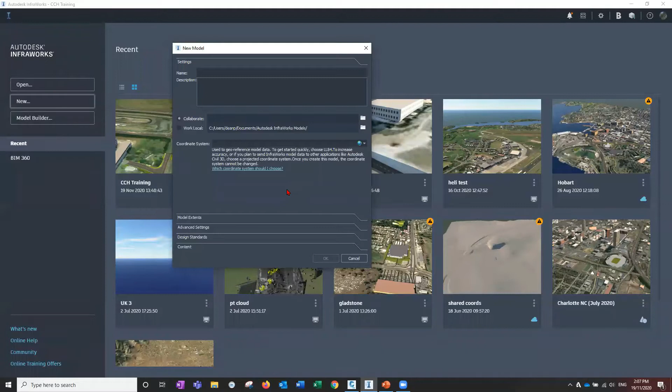And you get the same thing when you go into the model builder. Here you need to select a coordinate system, but it reminds you there, if you're unsure, select lat long 84, but you won't get the same accuracy down to millimeters.

All right, so having discussed those, I think that's all I need to look at. Yes, let's go and have a look at the road marking side of things, which was next on the list. So I'm going to go into here and start my example.

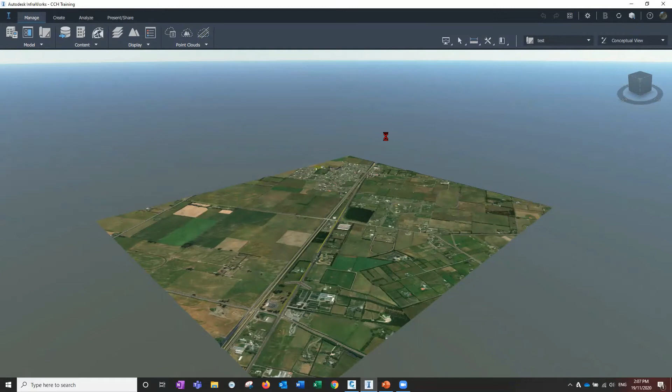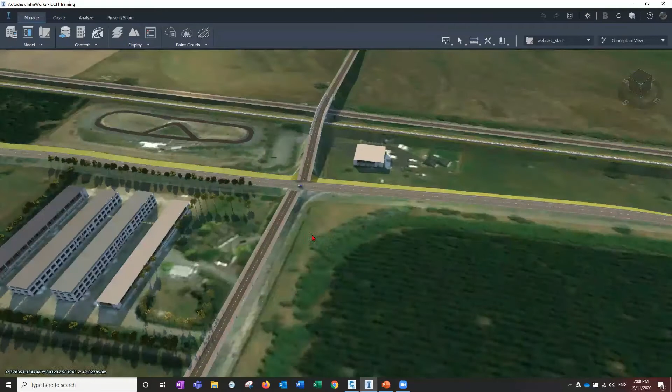All right, so this is just to the south of Christchurch in the South Island. I've just got a little example here, putting some trees and things to make it look pretty, of a little intersection. Before we play with that for my Civil 3D example, let's go and have a look at this road marking stuff.

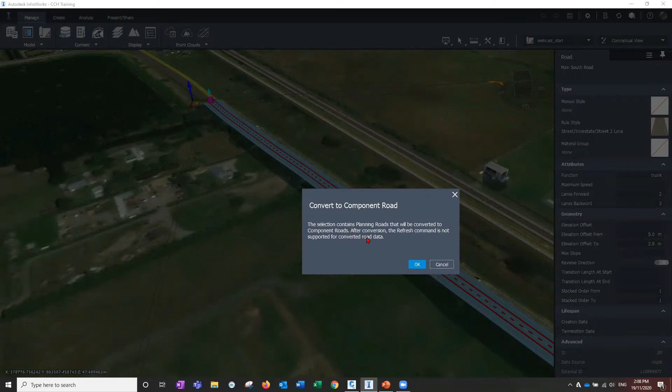So the road marking stuff applies to the component roads. If we look at this one here, that's not a component road yet, so I'm going to convert it. This is new actually - it's telling you that if you convert this to a component road, since it came in from the model builder, it will no longer refresh with the model builder. That's fine, that's what we want.

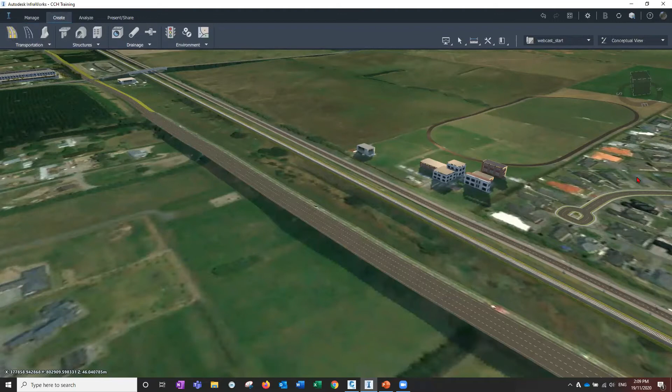Okay, and I will sketch in a little piece of road to go with this. So let's do an intersection, I suppose - an X intersection would be okay. So create a new component road. What type do I want? Let's see from assembly here.

4-lane, no, that's a bridge. 4-lane divided - I suppose that would be all right, let's try that one. I'm going to start over here, crossing across at an angle, down through here. There's my... oops, the curve didn't go in there, but let's just try it anyway. And then draw.

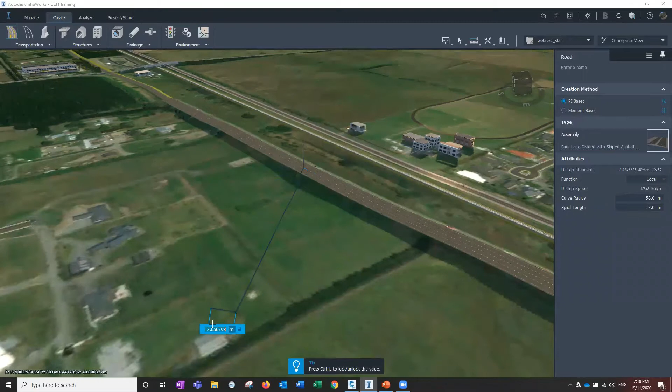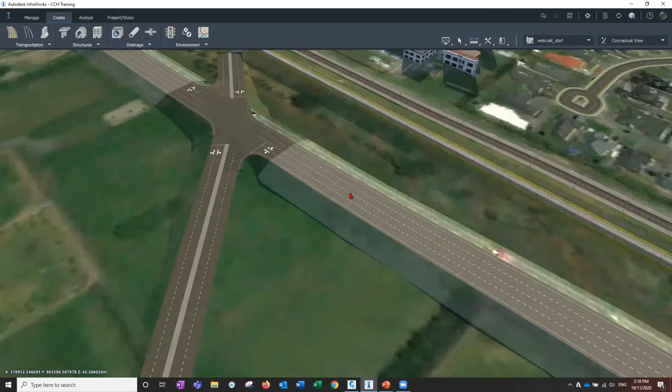Okay, so road marking. Well, if we're going to want to see road marking, we're going to have to probably remove... oh, we'll do it on the other road actually. We'll keep that median in just to be a little bit different. On this other road, we can pick the road itself to get the center line.

And if we right click on there, there is the pavement markings, which is the new one, and go modify lane markings. If we back off there, you can see it's just a dashed line down the middle of the road, which is probably unlikely on a highway like this. Selecting it, right click and go to pavement markings, modify lane markings.

We now get some options here. So we've got the lane marking on one side, the second side, which is those two, and you've got the center one, which is the median. We can change the style here to say a non-dashed, no overtaking line. And we can change the color to be our yellow road stripe.

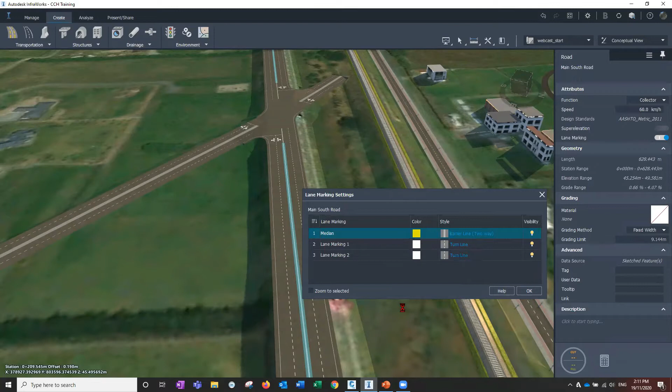And if we wanted to adjust for the heck of it, we could make one of these lanes very narrow and make it a bike lane or something like that. Perhaps if we wanted a green line, we can go more styles and make it - I'm just playing, I don't have an off green, which you might have. So this is going to be a very bright green, but I could make one of course. And there we get the ability to go and change those.

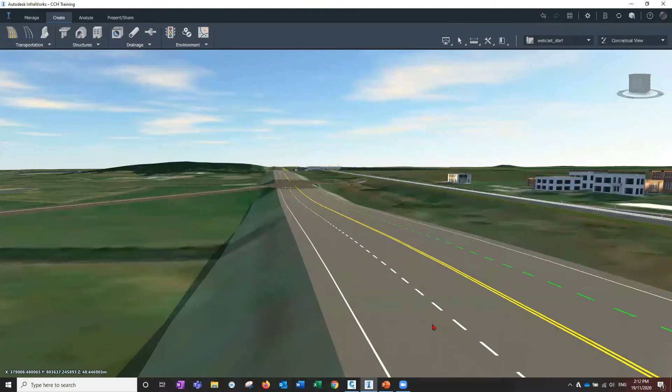The other thing that a lot of people didn't like, myself included, was that all of these lane markings had a shadow underneath them previously. Now they've actually removed the shadow, which was asked for a long time as well. But the lane marking itself still appears to be slightly above the ground surface, which is why we had the shadow underneath previously, but they just turned the shadows off, which makes it look a lot better.

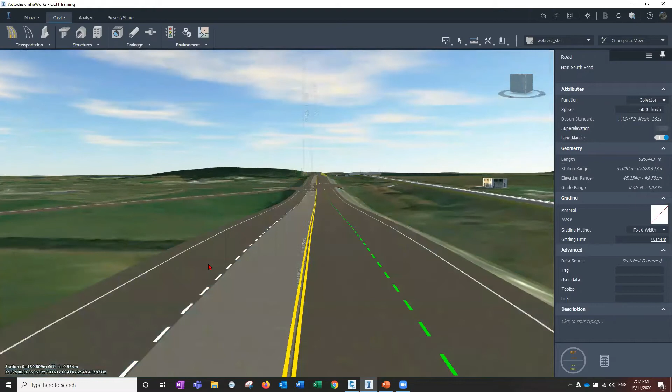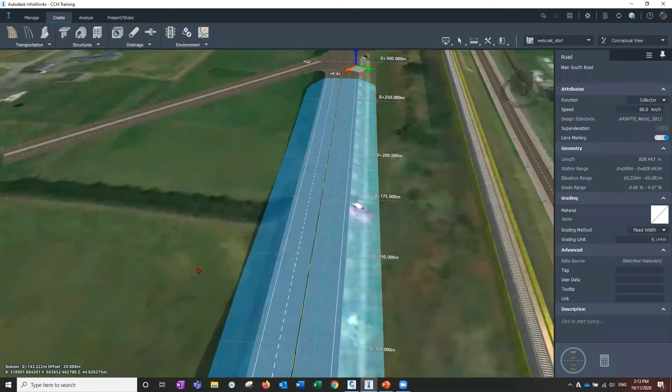Before you ask, I have been trying to find a way to split the center line or lane marking, such that you can have a double yellow line here, dashed on one side, yellow on the other, as was in the options we had for pavement markings. But it looks like it applies to the whole length of the alignment of that road, which is what it's actually running on at the moment. I've tried splitting it to put a new assembly in that area, but while you can change the assembly, the cross-sectional shape of the road, it doesn't let you put in a distinct or separate line in the middle. So I guess that will be coming, but for the moment it does the whole road.

But at least it gives us options we didn't have before. Now looking at the intersections, this is quite interesting - actually one of the things I've been asking for a while. If I put my intersection here and choose those lanes on one of the approach roads, you've got that yield line again that you can change the position of, where the lane actually comes into the intersection.

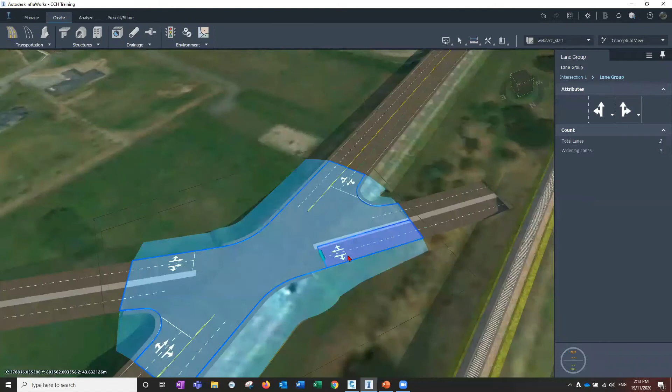We had that before, but here's the new thing. When I select that, up in the stack on the side, here is the ability to change the lane marking, which we had before. So if I make that just a left turn, that should do it. There, it's done it. But the thing I really wanted was these ones.

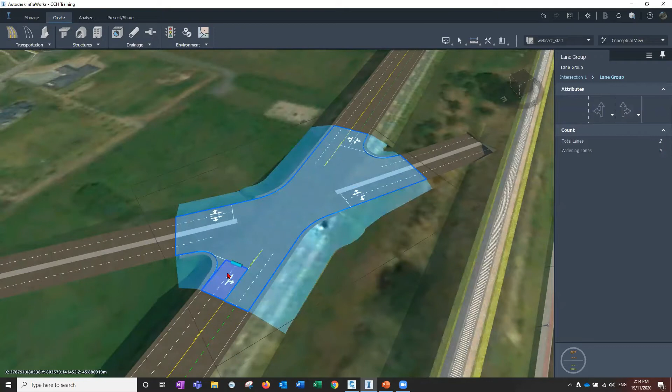On the main road, it's unlikely that you're going to be putting in these markings, so I want to turn those off. Instead of using the drop down, you just click on the arrow, and that will turn those off. You can do the same on the other side. That's something I personally have been asking for several years now, and it's nice to have.

Now, I don't think you can extend these yield lines all the way in, or can you? Yeah, you can, but it doesn't do the other approach. I did see on the web somebody talking about that, saying that it's coming - the ability to run those lines all the way through an intersection is coming. Something that's being worked on.

That will be nice. Now you can turn off that yield line, but let's have a go - it eliminates the other things as well. Yeah, I think it turns off the marking for the intersection itself. The yield line, if you turn those off, I think it removes all of the marking, including the arrows. So still a few things around there, but they're working on it.

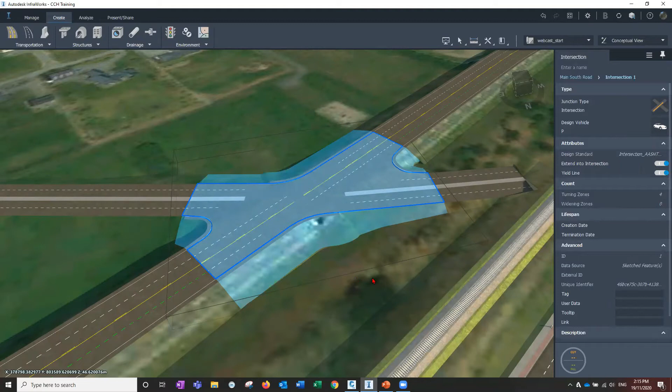There's also one more thing with these. If you do something that doesn't really make any sense - let's try this, whoops, don't turn it off, do it that way - there we go. If you get a conflict, so obviously straight through traffic, you don't want these ones turning into them, it'll highlight in orange and say there's a conflict on this approach. So that's a nice little warning as well, if you haven't seen those.

All right, so that is the lane marking. Anything I need to talk about on that additionally?

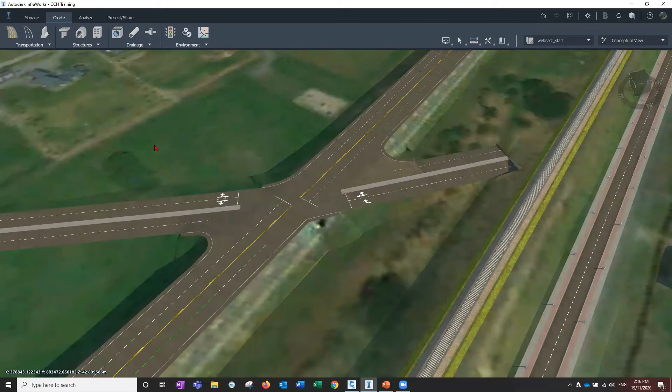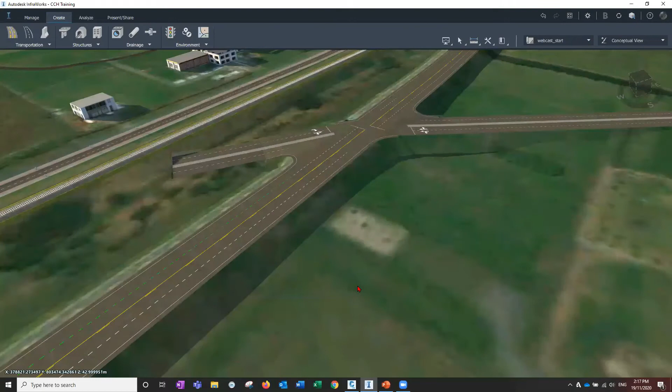So moving on then, we want to look at the import of Civil 3D models into here. Now, if you haven't seen this for a few years, it did change - I think it was the end of 2020, but certainly beginning of 2021 it changed. So if I go back to my Civil 3D here, I have a design I've already been playing around with to modify that intersection down where the factory is.

It's in one of my drawings here, let's go and find it. The Infraworks start, I believe - hope so. Just make sure I'm in the right place. I'll turn on the map data.

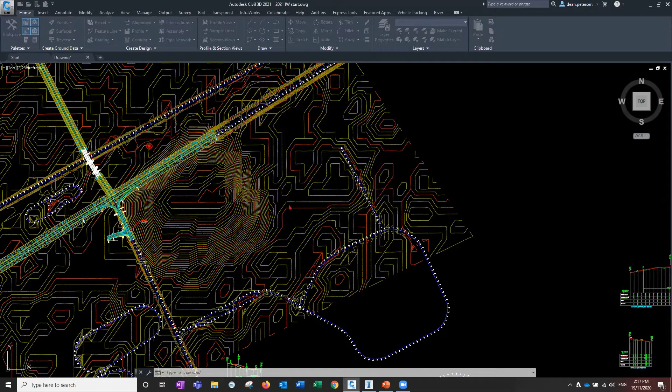Okay, hopefully we should find the same imagery that we saw. Yep, we're still in the right place. So there's that big forest or pine plantation, there's my buildings, and we're on the same intersection.

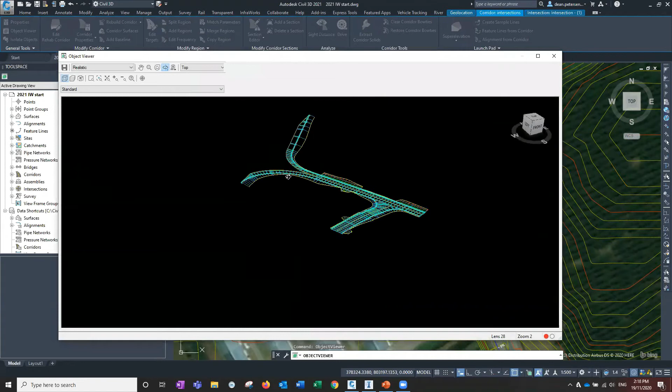So what I've actually done is construct a new Civil 3D corridor to rebuild that intersection and do some interesting things with an on-ramp and an off-ramp. I wanted to test something a little more complicated, in terms of having different regions and things that you want to pull into InfraWorks. That was the idea behind the changes they made to being able to import these things.

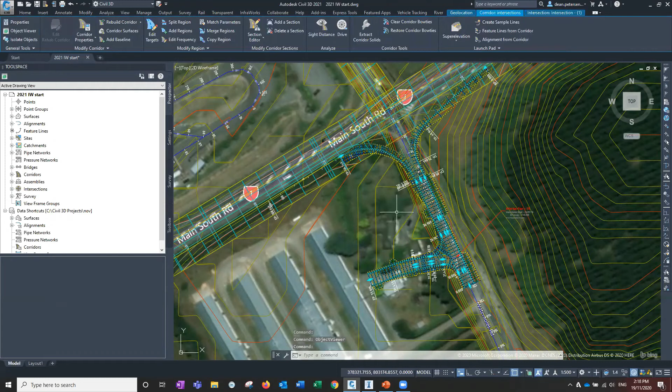So I've got an intersection there, and I've got my own regions for the two turning ramps. It's difficult to make that in InfraWorks itself, but you're much more capable in Civil 3D of making those, and then we want to take them back to InfraWorks to see those.

So I'll just check that everything has been rebuilt. Intersections rebuild - that should be mine, all rebuilt there. I'll do a save.

I think we are able to open this without closing it in Civil 3D, so we'll give it a try. It may complain, but we'll see how we go - be a good test. So back in here, there's my plant, the pine plantation there.

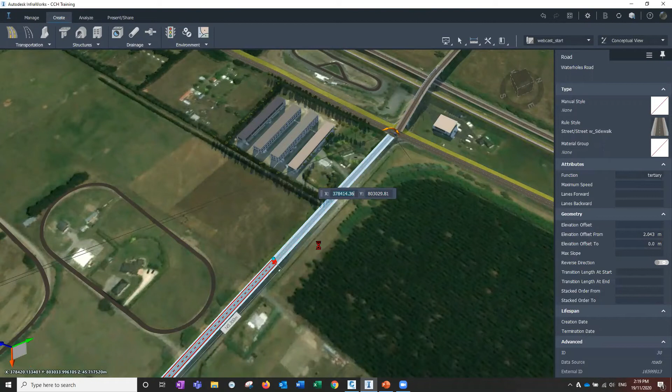I'm going to pick the existing road that came from Model Builder, drag it back to make myself some space. We'll play around with that later on to connect it back up.

So this is the area where my civil model is. Now what we want to do is make a new proposal here. I'll call it demo. Demo, yep, why not? Demo.

And we'll bring in our Civil 3D drawing. Now, to get this to work, the transfer we're about to see, to bring in a better or easier to use Civil 3D model, you do need to be using the same year version of Civil 3D and InfraWorks. So if you're using, as I am here, InfraWorks 2021.1, you do need to be using Civil 3D 2021 as well, because it is a two-way process.

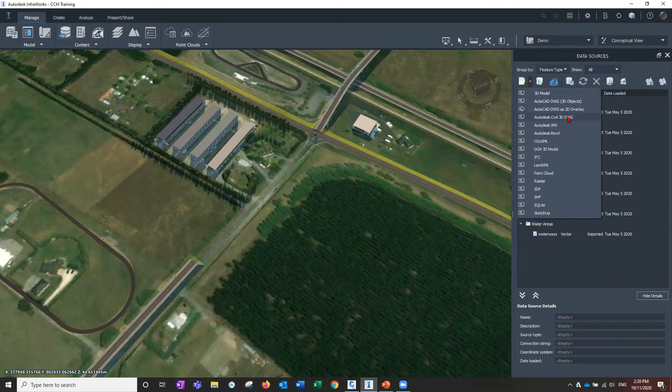So in here, if I go to the data sources, and I'm going to read in my Civil 3D DWG - it was on there, InfraWorks start is the one I just did. And it does the connection. Now it'll scan that whole drawing and find all the things that can be brought in. We only want the corridor.

So that's all I'm going to bring in. We don't need all these ground surfaces and other surfaces - those are top surfaces of the corridor. No, so it's just the one that says roads up the top here. Those are the alignments and corridors. Going to go OK.

Go and configure it, so it appears over here in the data sources. And go to Civil 3D drawing. Now here's all the alignments, everything that was in the drawing. It still has one that thinks it's still out of date there - a little warning that says if you haven't rebuilt the corridor, for some reason that curb alignment on the intersection thinks it's out of date, but the rest looks all right. I think that's probably just a little error, maybe because I've got it open at the same time.

Could be. So I'm going to pick that line, hold down shift, pick the top line, and first of all turn them all off - I don't want them all coming in. I just want my corridor I've designed. So that was, let me see, the driveway.

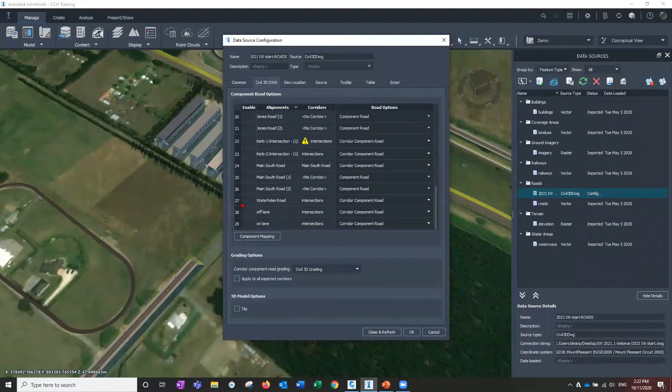Now, each of these is a region of my corridor. So, yes, a region - there will be regions. So the driveway was one piece, the Waterholes Road was the other road. So that's the two branches, the driveway and the Waterholes Road.

Then we've got, I want the alignments of my intersection, those regions coming in. And also my two on-ramp and off-ramps, which were called, where are we? Off-lane and on-lane, there we go. That should be all I need.

Now, I can just go OK, and that's what I'm going to do. Oh sorry, close and refresh, and it will bring it in all with a whole bunch of defaults already preset automatically, which is fine. But if you don't like it, you've got this component mapping here.

Now, this was here before in 2021, but you can change the material that gets applied to all the different components of the corridor that's coming in. So there's your footpaths, curbs, shoulders, etc. Change the materials that are applied to each simply by clicking on there.

Sorry, on the ellipsis button. Oh no, oh that's interesting - that's the priorities of which draws over the top of which. So where are we? Oh, it's double click on it, and it opens that up, and you can apply different material to each component. However, I'm just going to go with the defaults because they're actually pretty good.

So I'm going to cancel out of there. But before you do that, you do get an option here down the bottom to talk about the grading, or decide what you want to do with the grading. Either put no grading on the side of the road, use InfraWorks grading, or we can use the grading that Civil 3D worked out - so the actual batter slopes from Civil 3D. I'm going to use the batter slopes from Civil 3D because they're more complex than the standard slopes on InfraWorks, and we should see that happen when it comes in.

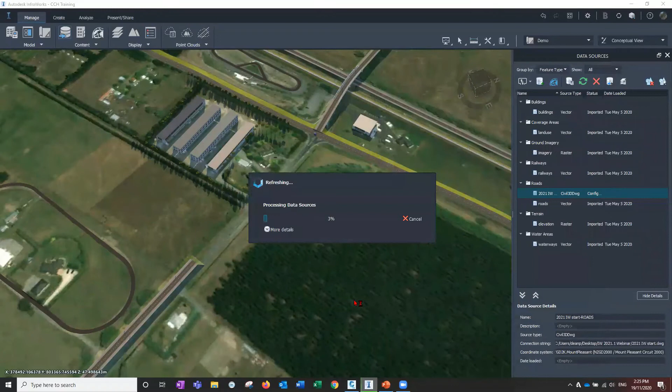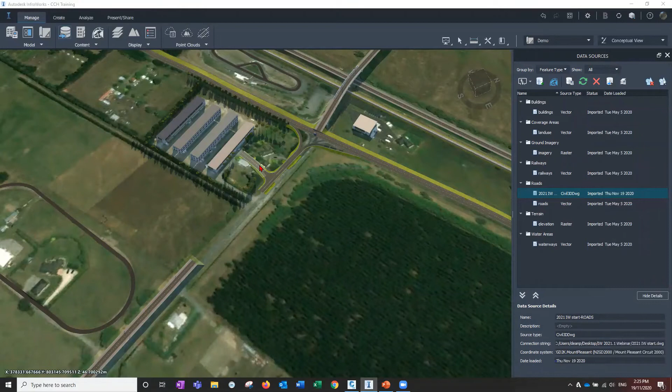I'll just take a moment to read that in as a model. Sorry, I just needed to clear my throat there. All right, so here is the Civil 3D model that it has brought in.

And it's done a fairly good job of that, actually. Or actually, I'd say a pretty good job. When I first did this, I did notice that I had actually made a mistake in Civil 3D. I didn't notice it in Civil 3D until I first brought it in here, so that's why I left it in. My road is changing width, and it's blatantly obvious when you've got a nice pictorial view like this that I've got something wrong. So we can go back and modify that in a minute.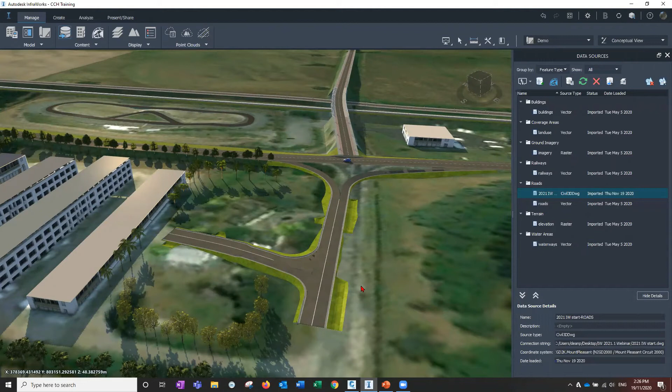Now, as I say, we did have this in 2021.0, though they have made the process a little bit more reliable, and they've got the ability to use the coordinate systems to bring them in.

You can see it's doing a nice match up with the edge of my road with my little turn lanes here that I've sketched in very quickly. I haven't spent much time on this, so it's a bit rough, but you should see what's going on. And as you can see, we've got the batter slopes from Civil 3D, so when it's changing from cut into fill, it's putting in those table drains as the Civil 3D defaults.

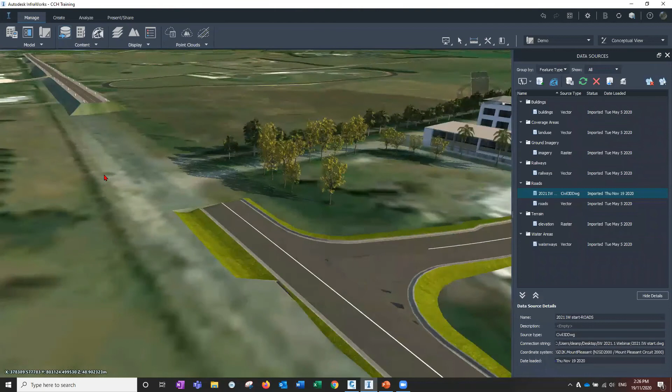So we can take our roads, or connect our roads back up. See if we can do that. Onto there somewhere. Overlap it just a bit. Oops, the elevation isn't good, is it? It's about there somewhere.

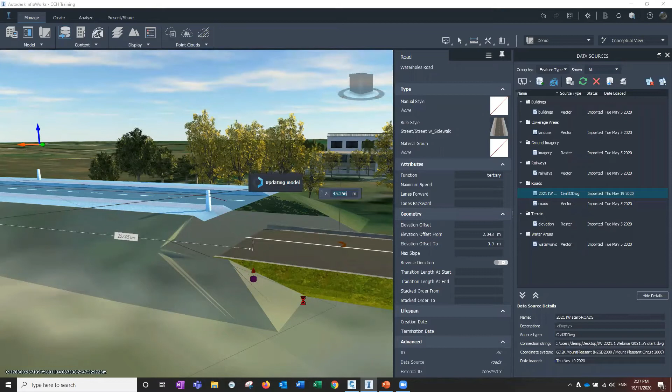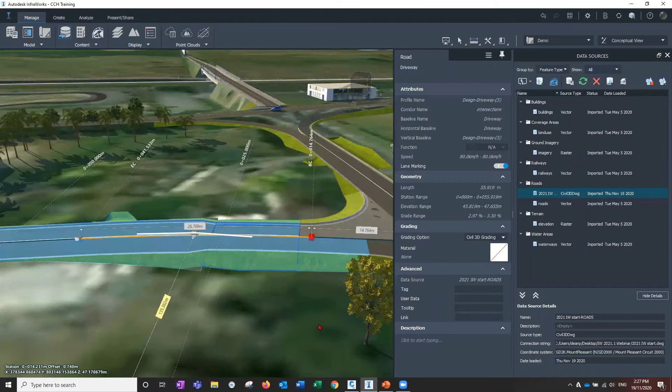Now they won't snap. It's actually brought the civil road through as a component road, but it's a non-editable, pretty close, non-editable component road. So while I can select that, you will see there is, there should be a profile in the middle of that. Oh, you can see it right over there. And there's the grip for the vertical elevation change. We should get one here, there we go. But the grips are non-editable, as you can see. So it builds a component road out of it, but you won't be able to change the components.

You can probably change the material on them individually if you really want it for some reason, but you need to change it back in Civil 3D. So let's show you how you do that. So we need to fix up this piece of road.

Sometimes you might find one of these corners on the curb return has a little piece missing. We'll see, it hasn't come up yet, but there's an easy solution to that if you do. So let's go back into Civil 3D.

We'll go and fix up our problem, which is this. My two offset alignments here didn't run all the way to the end of the road, so I'm just going to drag those down, rebuild my corridor. There we go, let's fix those up, do a save.

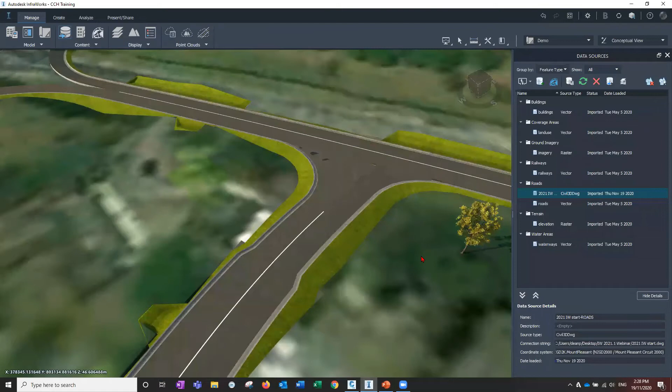And back to Infraworks. So changes we've made in Civil 3D will update by coming into the roads here. You can right click on there. And you actually don't want to refresh, that just refreshes Infraworks. What you want is re-import. We'll go and find where that drawing was saved when we imported it. And it will just reread it, bring it back in with all the settings that we've applied to it already.

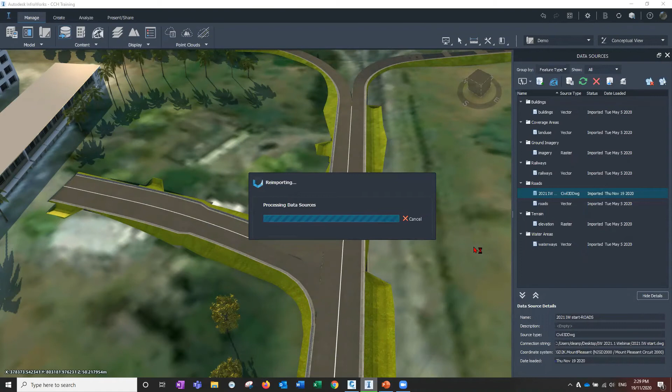Okay, and we fix that one up. No, I'm not seeing that thing in the corner. Sometimes you might find that the last little few triangles in the curb return, I did see this a couple of times, or in the batter slope, I should say, disappear on the edge of one of these curb returns. The simple solution to that is just put a frequency line just a millimeter away from the edge of that region in Civil 3D, and then just re-import it, and it will give you triangulation right up to that line.

There are still a couple of little things like here that don't quite match up properly. I guess they're still working on those a little bit, but most of it's good. These shadows are interesting though. They weren't there in 2021.0, but they've come in. I haven't yet found a way to turn those off. So I presume that's something that's, with the little changes that they made, has been introduced. And I guess that will be taken out in time as well.

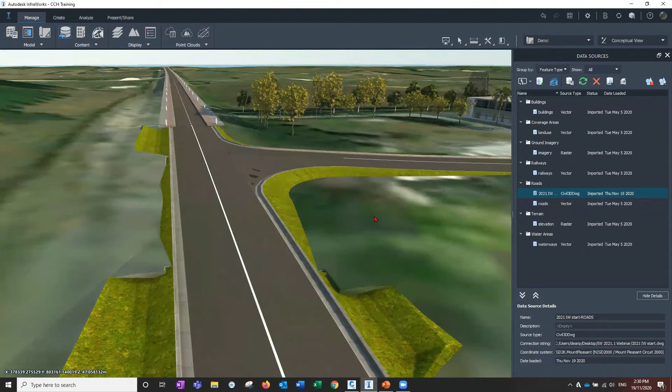However, these are now component roads, as I said, though non-editable ones. But one thing you can edit is the pavement markings like we did before. So if we wanted to have, instead of that, as our dashed line, and we'll make it yellow as well.

There you go, you can do those now. Because we don't have pavement marking in Civil 3D anyway, we can change it once we get it in here. Again, it's for the entire length of that region, that alignment region.

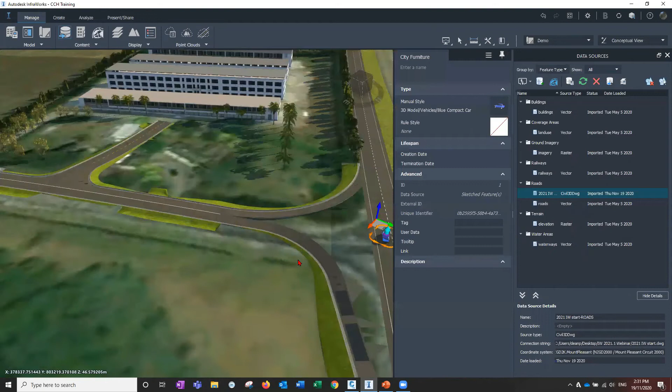And then, of course, you can duplicate those, Control D, paste it there. As per usual, dress up your scene, make it look nice, and perhaps change to a different vehicle. What do we want? One of those.

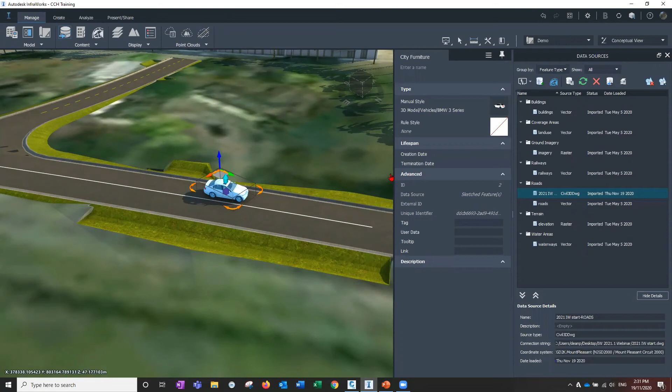There is an Australian New Zealand country kit for Infraworks, if you're interested. And that will do things like, let's just duplicate that.

I think we've got one in here, this one. Put these in. So lots of furniture for the Australian New Zealand region. There you go. And there's lots of traffic lights and those sorts of things for this area, for this part of the world.

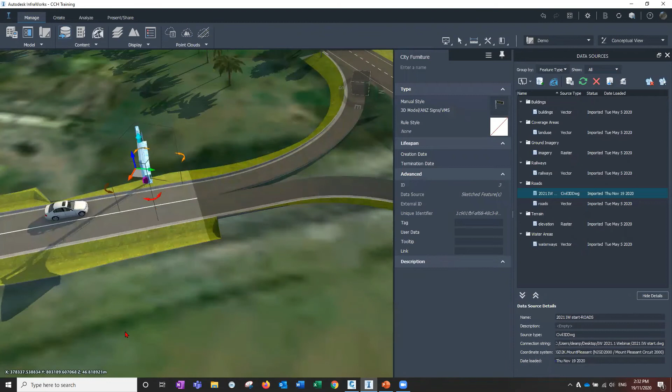And that makes things look a lot nicer for what we typically want to see in our models, rather than the American styles. So that's a little ANZ country kit for Infraworks, made by the guys in Autodesk Australia. If you're needing that or want it, it is a manual process to install it, but drop us a line and I'll give you a link to download it.

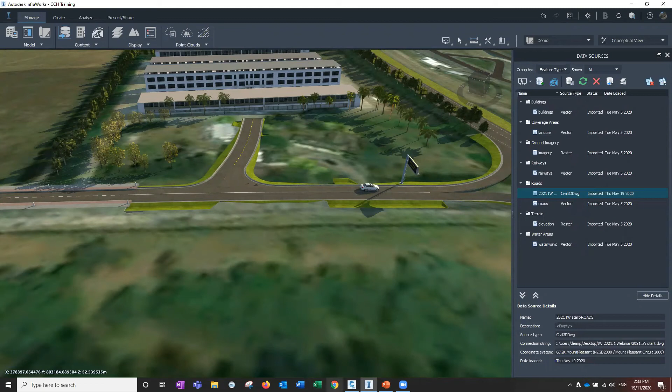So the next thing to look at was the changes they've made to the bridges workflow. Now I'm going to just pull up some of you might have seen this already, the Autodesk little video that they put up on YouTube.

So that doesn't actually go to here, actually. Oops, wrong one. I can just link through here. That'll take me straight in. Okay, and so rather than listen to them, I'll just talk you through it.

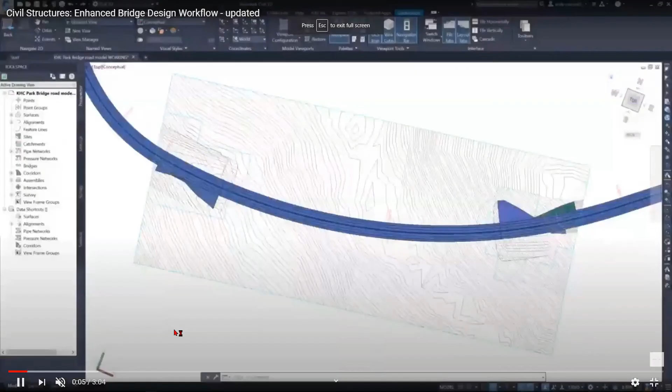So the idea is that they have created a workflow between Civil 3D, Infraworks, and Revit to allow bridge designers in particular to work or coordinate between them much more efficiently. So playing through here, they're starting off in Civil 3D,

doing the alignments, so we'll jump back there. Doing your alignment and your corridor, your profile, getting all those worked out, and then exporting that through to Infraworks. And in Infraworks, that model is read in, and it will start off just looking like that, which is not ideal because it's supposed to be a bridge across that gully.

It'll bring through, like I just did, import that Civil 3D drawing. See if we can get a better resolution on that. Now that is 720, okay.

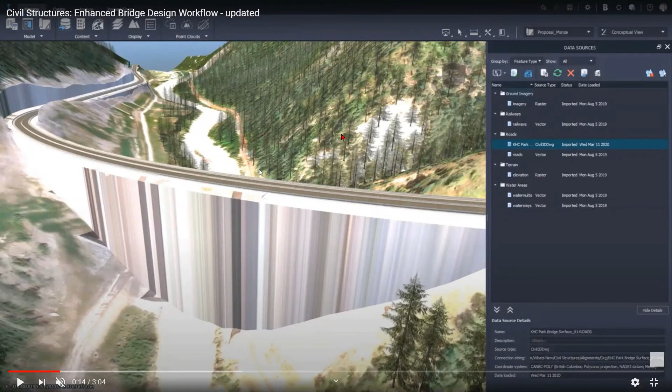From there on, you can, in Infraworks, then go and put a bridge in. So just as you normally would, choose a span that you want the bridge to run, go and modify all the bridge piers and all that sort of stuff that Infraworks does very well, all your girders and those sorts of things.

Now there is this new thing here, which is, if I just jump back a bit, Send to spreadsheet. So rather than having to change each pier individually or change a pier and muck around with all the settings in Infraworks, which can take a while, especially when you're working on not just the piers, but the actual girders in the bridge, it can be a bit finicky.

Now you can actually send it to spreadsheet, and it will take all these parameters of each component of the bridge, spit it out to Excel. You can modify in Excel and then update existing to bring it back. So this will show you that little process.

Here is an Excel, it's changing all the parameters that they want to in there. These obviously including formulas in there, and bringing it all back. And the same with these.

So that's a nice way to work, and I'll have a quick look at that in a moment. I'll just make a note of that. Excel.

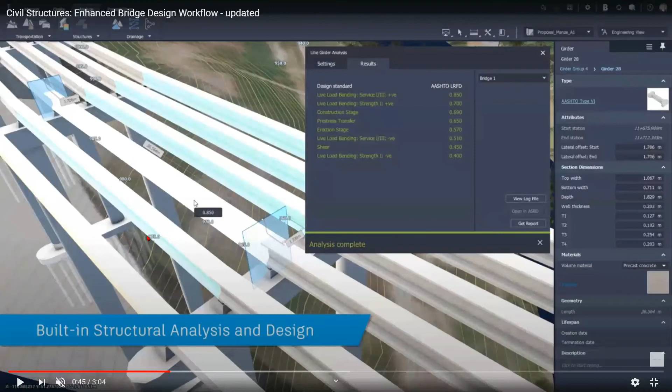Also, they've improved, for those who do bridge work, the line girder analysis, which is a first order analysis on the girders of the bridge, the strength, and it produces the report. Now this was there before, but they've just made it a bit better.

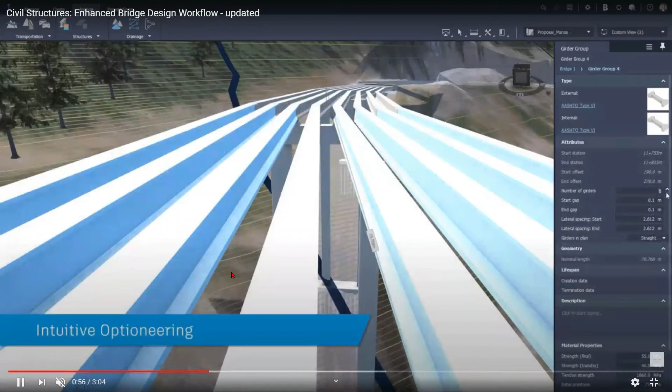But beyond that, they've also, well before we get to beyond that, they've added in other components you can add to your bridge, like these webs and stiffeners and things like that. So we'll have a look at that too. But this is the further analysis you can do.

You can export it out to Autodesk Structural Bridge Design if you're using that analysis package, and you can do the finite element model creation. We used to always call it finite elephant. It's just a bit funny. Anyway,

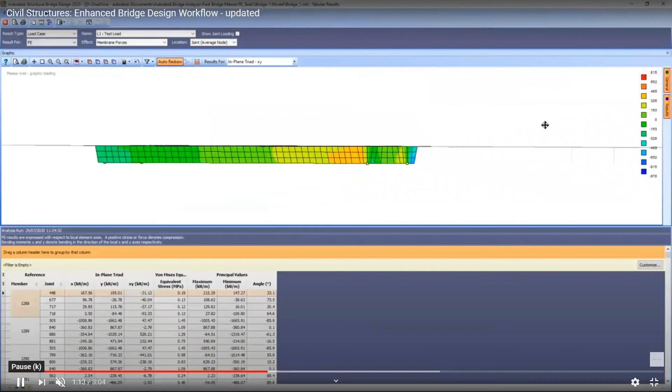that exports out directly to there now from Infraworks, where you can do a much more detailed and advanced analysis. So that's nice for those who are doing that sort of thing with bridges.

However, the idea is that you can export this, any changes that you make in Civil 3D to the alignment, for instance. You just update the Civil 3D drawing like we did before, and all the bridge and everything else will move with it.

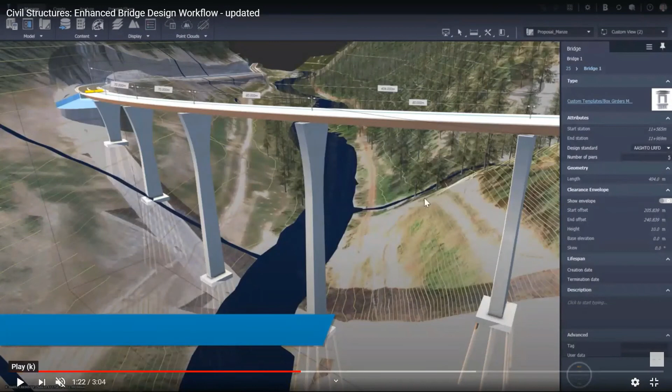So you don't have to remake everything you've done. It will just change the alignment geometry in Infraworks to reflect the changes made in Civil, and then taking it out to Revit.

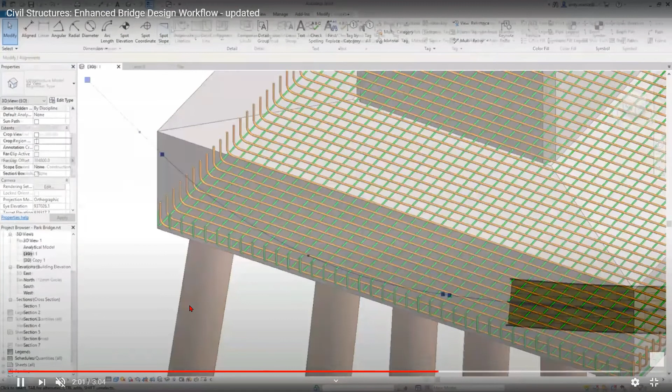They've changed the families a little bit in Revit so we get a bit closer to what Revit people actually want. But I think it's probably 50% a design tool at the moment, and you'd have to do it fully in Revit with the right families later on. The idea is that we can update and change this in Infraworks, and then update things like stiffeners, and that will update automatically and change the Revit model because you've changed it in Infraworks. Again, in Revit, you can start putting in all your reinforcing and things like that.

Pause it there again. This is another update - they've actually taken the alignment string, the alignment and profile. In fact, the string for the center line of the structure is exporting as an alignment, or certainly as a string, that can be used in Revit itself, which is good. Start that playing - yep, so you're getting all your stationing labels and things like that all coming through.

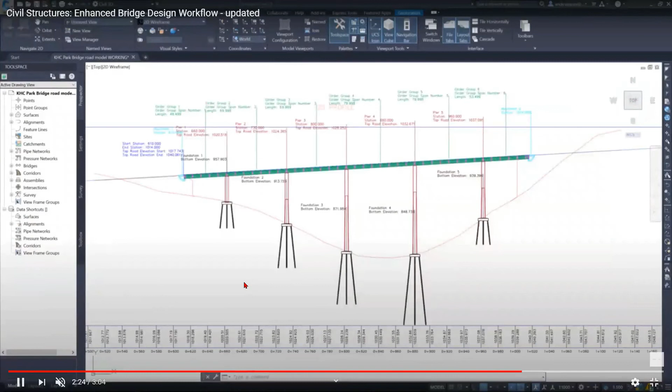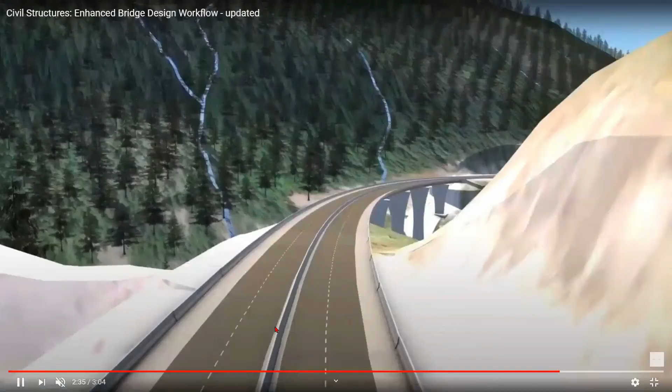That being said, the bridge can also go back to Civil 3D, Final Plan Production Civil 3D. So in Civil 3D we can read the bridge back in, and it all comes out in separate layers, not just a big block. So you can start controlling that and looking at it in the profile views by layer. Let's go and have a look at that.

This is just a little panoramic fly through once you've done all that. But it's giving you a lot more direct link between all those different packages, so you don't have to import and export multiple times - just modify it in one package and get it to update the other package.

So back into, if we can, Infraworks. Actually, let's go and have a look at Civil 3D first, I think. Let's go and have a look. Back in Civil 3D, there's a little bridge I've exported, and I'll just turn off my imagery here just to make it a bit easier to see what's going on.

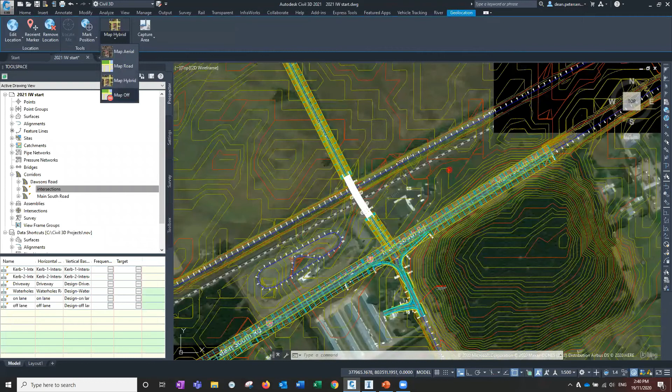There we go, that's a bridge exported from Civil 3D - sorry, exported into Civil 3D. And all the different components, we're going to have a look at the layer of that one. That's the deck, and it's on - oh no, it's actually on layer 0. This one.

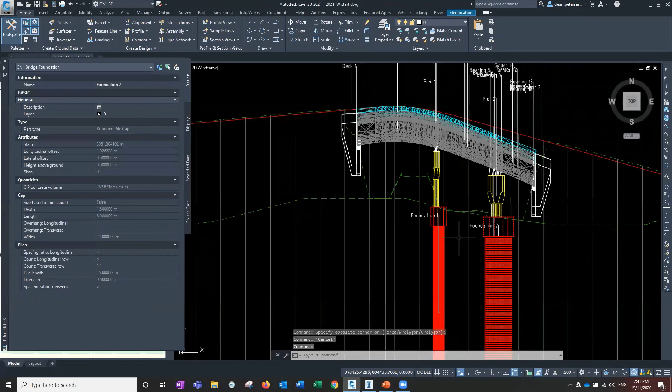No, those are on layer 0. What about these ones? It gives you the ability - it's basically split into separate components. Maybe that's not on layer 0. No. Oh, it'll be in the projected objects.

So if we go into the profile view properties, that's come through as a projected object. So here's your piers and your girders and things like that. You can change the styles that they're all using to get those to come out and change colors and all those sorts of things.

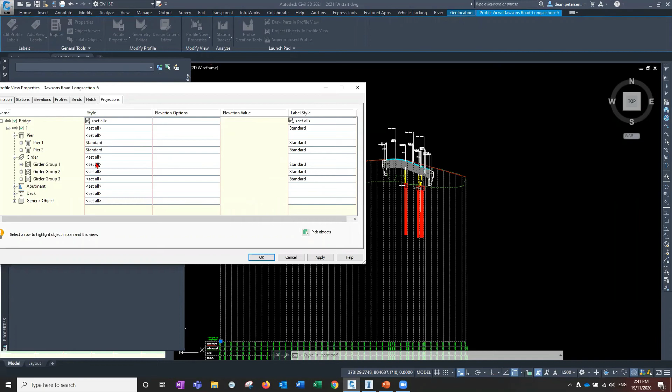Basically it's splitting the bridge up into all the components that you can label up differently, as you can see in this particular drawing, either label or color, or both. I've got the different components split out into different colors so they're easier to see, and our bearing heights and things changing as they normally would. So it's a full 3D block of the actual bridge itself - it comes into Civil 3D, so you can embellish your Civil 3D drawings with what's actually been done in Infraworks.

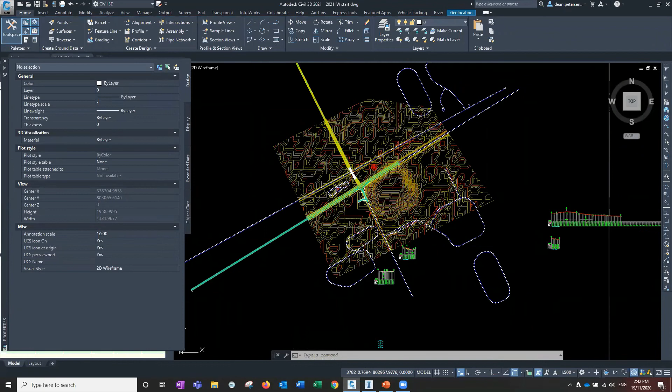To take it a step further, let's go into Infraworks itself again. I've got a little bridge down here - here it is, next to the BMX, or motorbike track, it's probably a motorbike track. Let's get underneath the road now.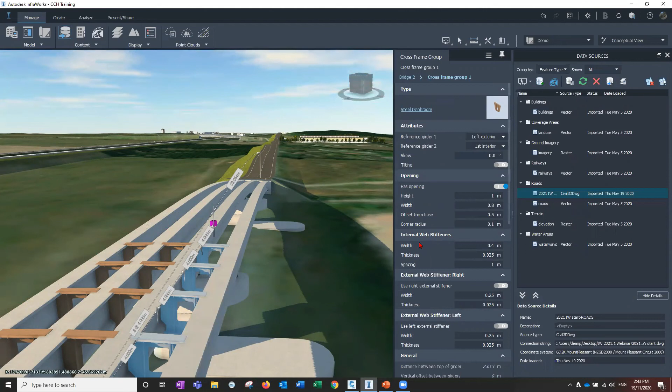They have lots and lots of parametric dimensions that you can change, the texture that's on them, and so on and so forth. There's masses of things you can change in the dimensioning of those - all the web stiffeners and all that sort of stuff can be changed, skew angles and so on. So that's a steel diaphragm. Then we've got the inverted V, which is the V going upwards, or the standard cross frame, which would be the V going downwards.

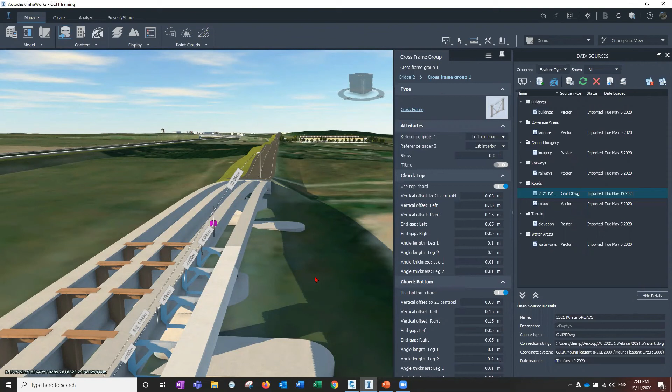I'll do it, still thinking about it. There we go, V going downwards.

To apply these or put them in, you pick a beam girder, right click on it, go add component, and now you've got the cross frame. That's the new one. We want to put it across all of those, rather than just between an individual two. So I'll hit enter to confirm.

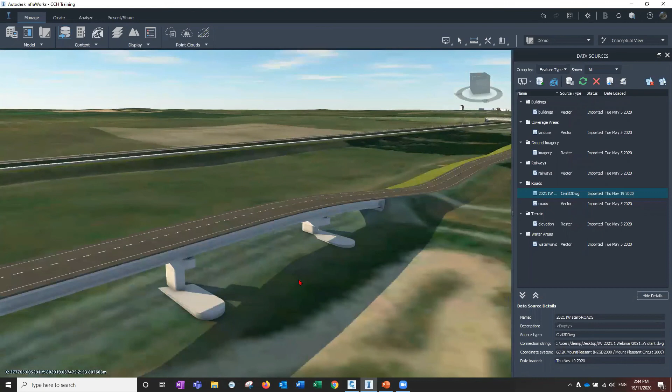Oops, don't know whether that went in there, I don't think it did. We'll just try it, sometimes I've found this being new. If you go pick something else and then come back, it'll show you if something doesn't appear. It looks like it just hasn't worked, so let me try that again.

Pick that one, right click, go add component, cross frame. Select a reference girder, so if we pick the one on the other side and hit enter. Looks like it's doing something this time.

There we go - oh, I picked the wrong girder. I think I picked one it wasn't expecting, so we can do it between these two girders as well. Let's see if we can do that. Pick that one.

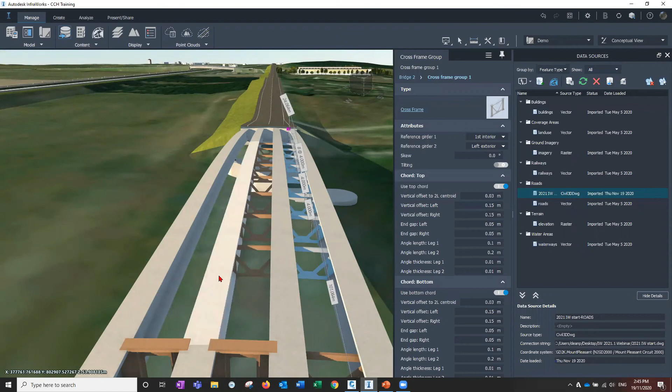Add component, cross frame. Now these cross frames are modifiable in the export to Excel as well, so I'm going to export that out too. Cross frame. There, so - no, so two.

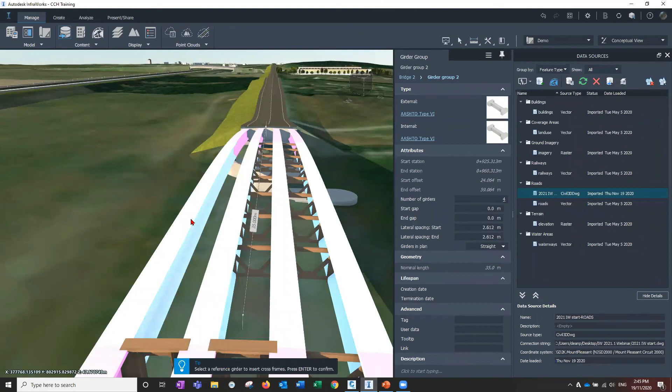Oh okay, that's not actually what it's asking me at all. It's asking me which spans I want to do it on. So not those ones, but I'll put it in this one. Oops, not that one - put it onto those girders. Sorry, keep missing the dang thing.

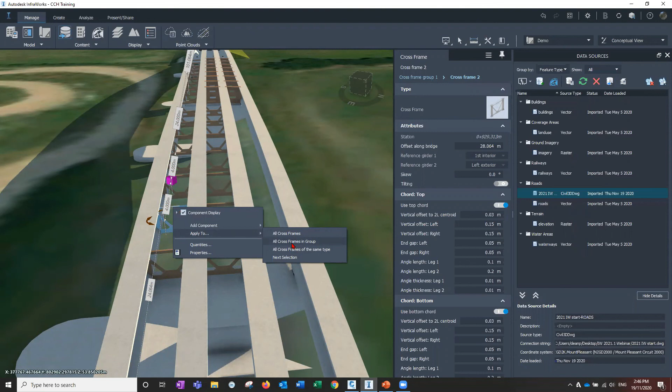You can pick them after the fact, but can we actually export and expand them across? Apply to all cross frames in the group. Now that's probably going to be - I'll try. Sorry, as I say, this is going to take a little bit of getting used to.

I might actually just delete those out and try it again. So I'm going to pick that one, hit the delete key. Let's just see if we can get this whole group to go again. Oh, I know what I would have done - I must have deselected that girder when I clicked on it. That's what would have happened.

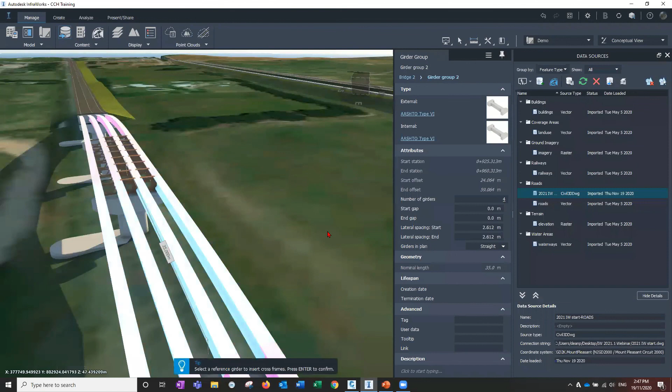All right, let's try it again. Pick that one, let's pick all of those girders. Right click and go add component, cross frame. Now has it got all of those? It looks like it has. Keep clicking outside of it. One more try and then we'll continue on.

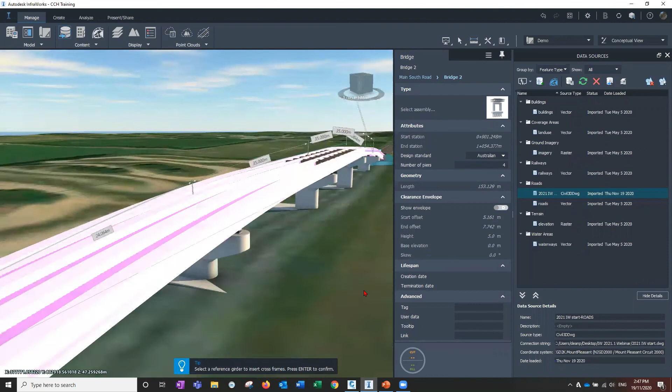I pick that, so right click on there and go add component, cross frame. It's got all of those selected. So we go enter. Enter. Looks like it's doing it - no, it's not.

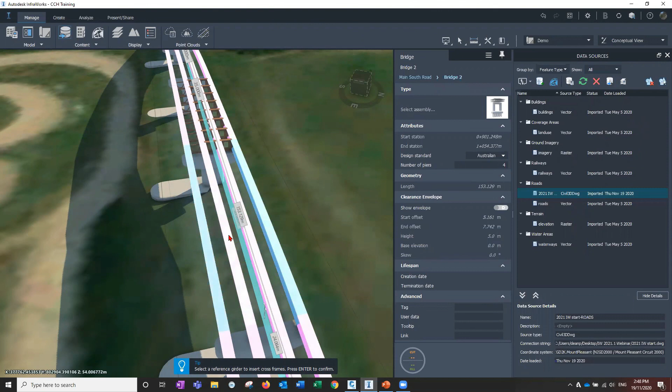I keep picking the top of it, which just gets in the way. That one there, cross frame between there. Maybe they need to be blue - yeah, they probably need to be blue to be selected. I think I was seeing pink. Let's try that.

Okay, and this is one of those times when - oh, there she goes. All right, finally. Yeah, I was seeing them as pink as being selected, but blue means the beam has been selected, not pink. There we go. All right, so they can be done and put in there and simply changed to what you want them to be.

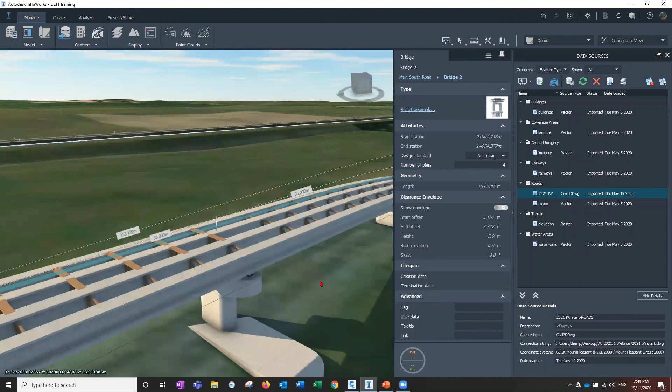But as I was saying, the export to Excel is actually pretty good rather than having to work through all these stacks every time you want to change something. So you right click on your bridge and go send to spreadsheet. The first time you do it, you'll only get the option to create new. I'm going to put it on the desktop for now - Bridge 2.xlsx. Yep, I'll place it.

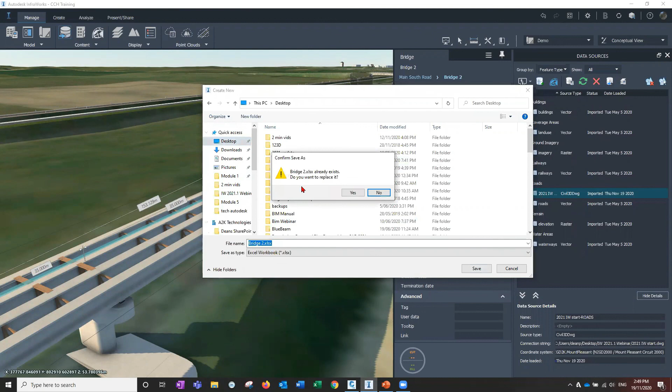So it looks like nothing much has come through to begin with, but actually all the components are down in these tabs at the bottom. There's the decks, the piers, the foundations, abutments, girder groups, and so forth. What else have we got? Bearings, cross frames in there. So all those parameters can all be changed. Obviously in Excel, you can just drag the columns across to update them all at once.